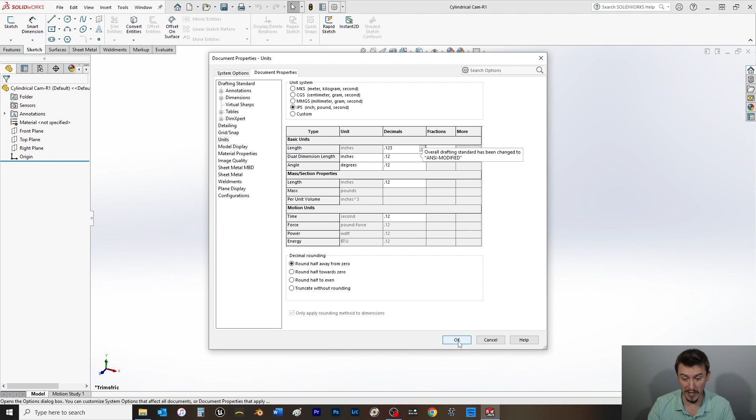And another thing we're going to want to do is come up here to the options, which is the little gear. We're going to go to the document property tab, go to units, and make sure that our length is set to 3 decimal places, and of course that we are in inch-pound-second if you aren't already. Click OK. Wait a moment for this to disappear.

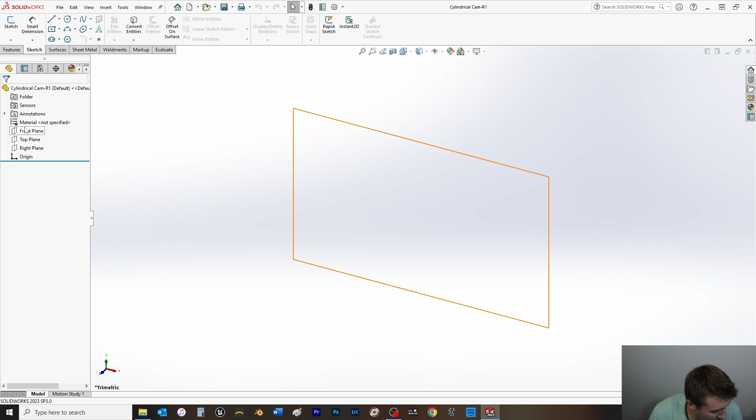And now from here, we're going to start with section 14.1 on page 305. We're simply going to draw a cylinder. So we will choose the front plane for this one. Control 8 to bring it normal to. Come up here and choose a circle. We'll make the center point of the circle coincident to the origin as always. No offsets here. Click and drag out, select OK, and then we are going to give it a diameter of 1.5 inches.

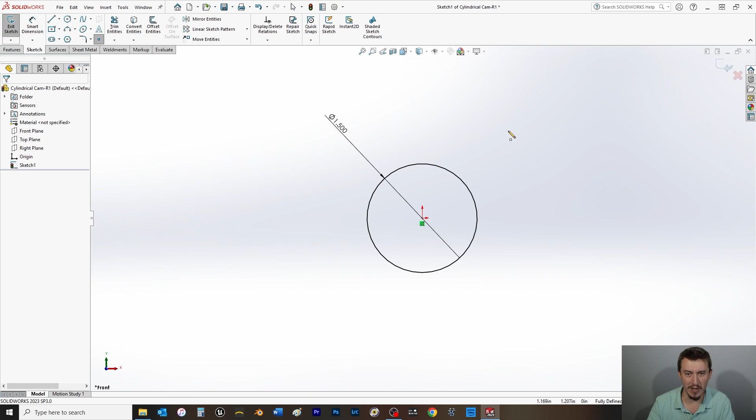And then from here, one other thing we're going to do, it's a simple little item to utilize, which is going to be a point. Depending on certain geometries, you may need a point to be able to create a reference in other situations. And you're going to see in a moment what this is going to come in handy for. So the point will be up here at the top quadrant. Click, select OK. Now something to keep in mind is I'm still in the point command, so we can click on it again to close out, or you could hit escape a couple of times.

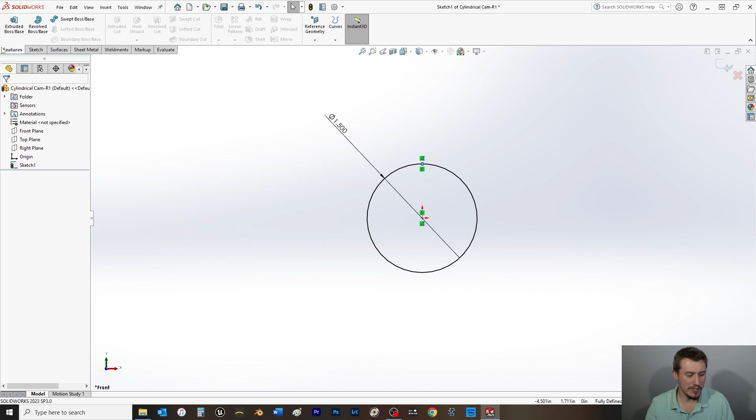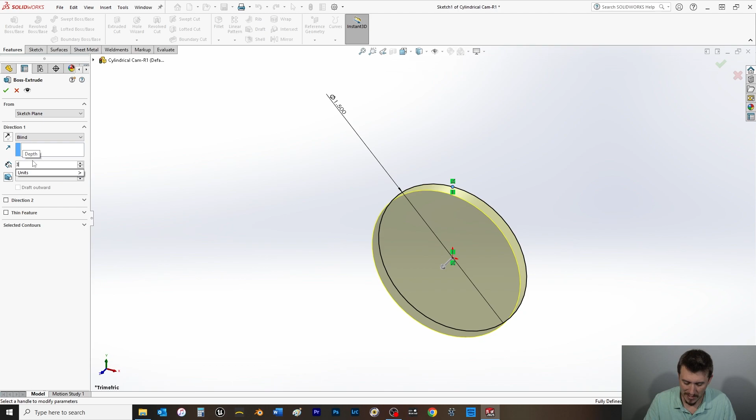Now from here we're going to go to the Features tab, and then we're going to choose the Extruded Boss Base. And in this case, we will do a boss extrude of 3 inches with the end condition being blind. So we'll leave it blind and we'll do 3 inches, enter, switch the direction the other way, click OK. Hit Control S, spacebar to bring it isometric, and we'll now move on to section 14.2 at the top of page 306.

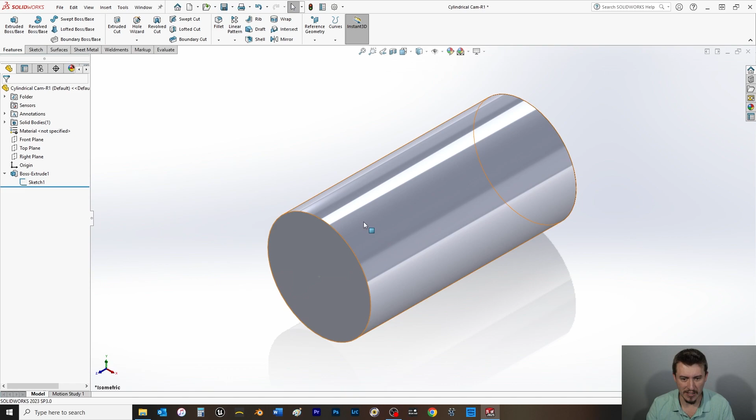Alright, so the next thing we're going to do here is move on to section 14.2 at the top of page 306, where we're going to create an auxiliary plane. And now we're going to implement that point from the previous sketch. So the first thing we can do here is in our feature tree on the left, choose the drop down arrow from the boss extrude feature, select sketch 1, make sure that it is visible. And then I'm going to rotate the part just a little bit and zoom in so you can see there's that point we made. It's a little difficult to see, but in a moment it'll be a little bit better.

So from here we can then, in the feature tree, select the top plane, because we want this auxiliary plane to be parallel to that and coincident to this point. So we'll have the top plane selected first. Again, there's 2 ways you could do this. You could start into the auxiliary reference geometry plane first, then select all of your coordinates or points and planes, but we'll work in this method.

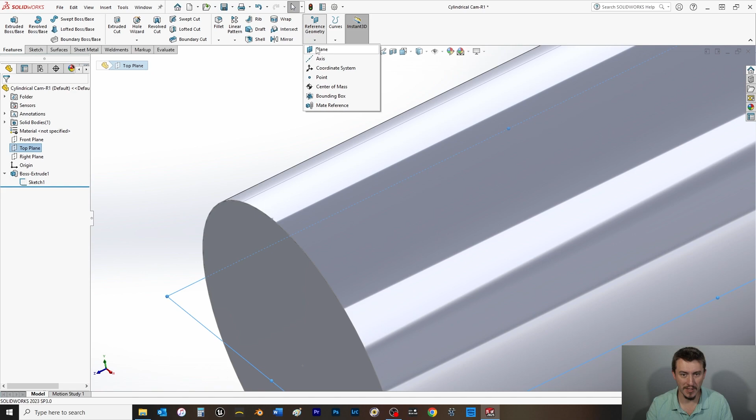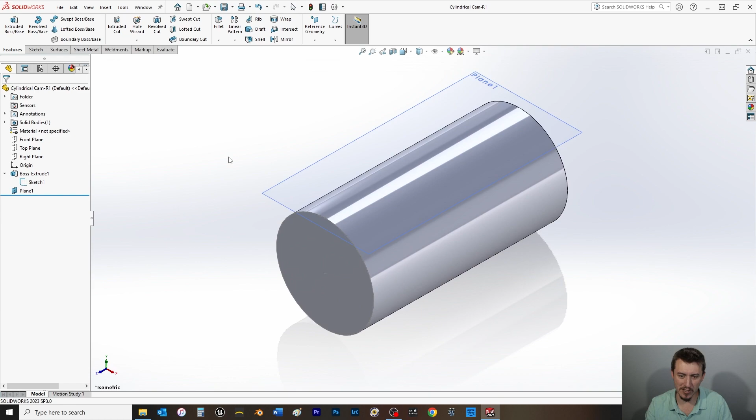So select the top plane, choose the drop down in the Features tab, plane, so now it's going to be the top plane, and it's just set with an offset distance right now, but then we're going to select that point there. And now this plane is fully defined. So from here we can select OK, and then we'll hit Control S, hit the spacebar, keep it isometric for the moment, and we'll now move on to section 14.3 at the middle of page 306.

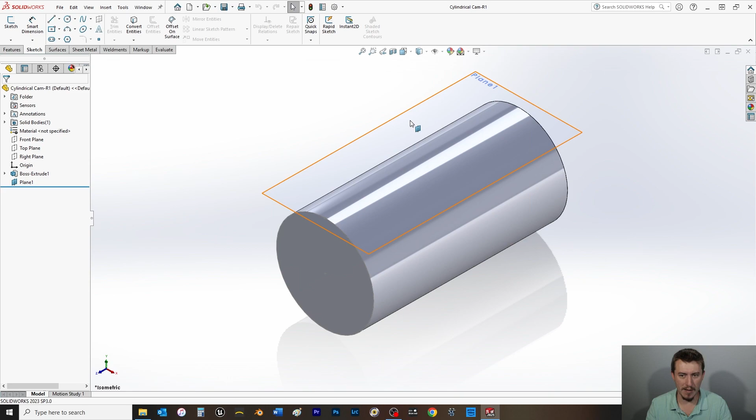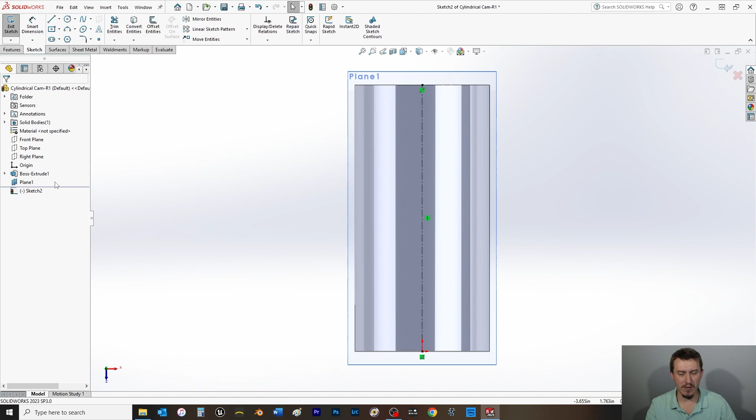Alright, section 14.3 at the middle of page 306, we're going to create the sketch profile for the wrap feature. So, let's grab this auxiliary plane 1 from either the feature tree or the graphics view, Control 8 to bring it normal to, come up to the sketch tab, and we'll start out by creating a center line, which will be midpoint the silhouette edge of the cylinder at the top and the bottom. Right click, select, and then from here we're going to use the mirror feature in a new way. Come up here to Tools, choose Sketch Tools, and choose Dynamic Mirror, and then we'll select the center line. Now notice down here at the bottom there's a little equal sign to indicate the dynamic mirror is active.

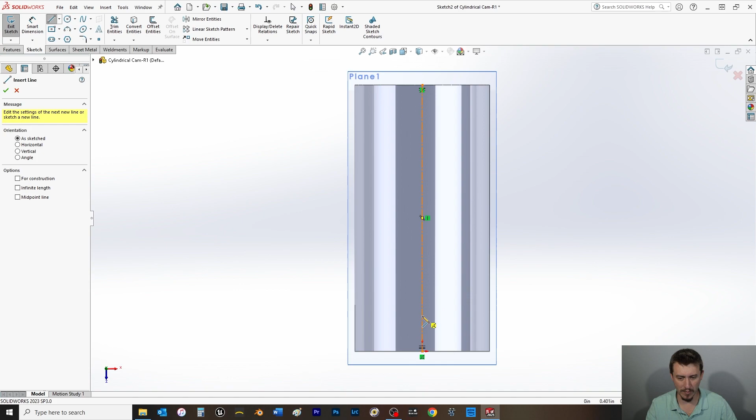Then from here we'll start our sketch. I'll choose a line and we'll make sure that one endpoint is coincident to the center line. Do a horizontal relation, drag out. And from here, as in previous videos, you can drag down to create an arc as such. Then we'll drag up to do a vertical line, and then we'll drag back in and create another arc like such, and then drag out to create another horizontal line, click and right click and select. Now notice as I sketched on one side, it copied it over to the other side automatically.

So that's the instant difference of dynamic mirroring versus the standard mirroring procedure, which is you draw your sketch, select all the sketch entities, then choose the center line to mirror it about, and then it mirrors it. So they'll have their advantages. Certain times you won't want to mirror every single sketch entity, so then you would want to use the regular mirror command in that case. But in this case, the dynamic mirror works out very well. So from here we can go over to page 307, where we're going to add the dimensions.

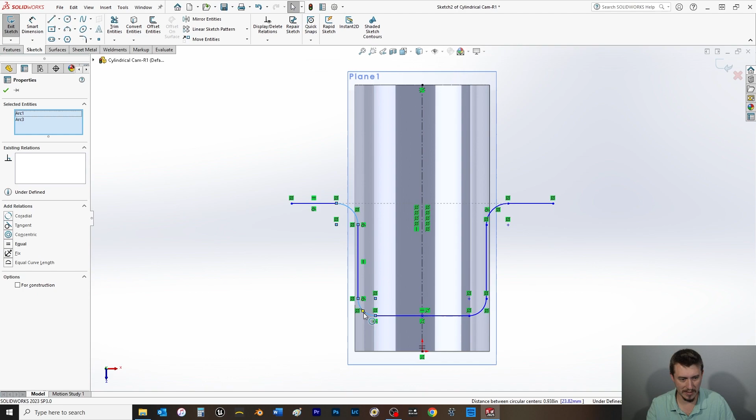So another thing we can also do real quickly too is press and hold the control key, select this arc, and do equal. And then from here we can choose the smart dimension, and then we're going to make this a 0.5 radius. And then we're going to make this point here and here 2 inches.

Now one thing I'm going to do real quick is drag this back up here, and then we'll also grab these lines, bring it back out, and drag it up just a little bit, just make some minor adjustments. And then we can choose our smart dimension, and this bottom line here to this point here is going to be 1.75.

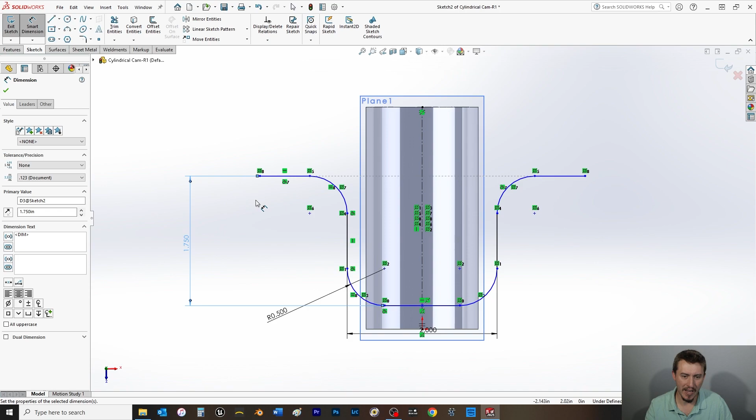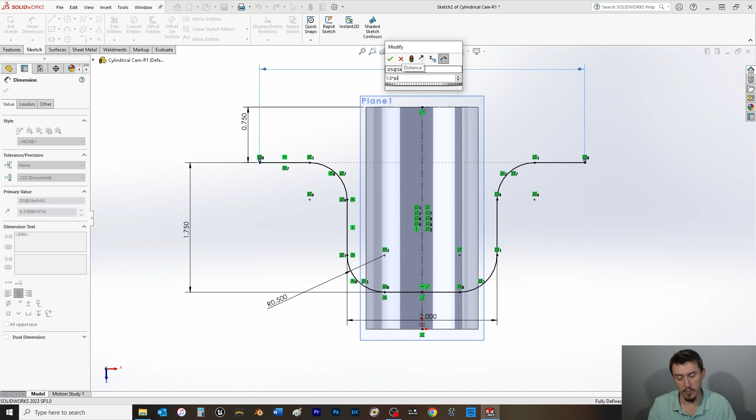And then from this point here to the silhouette edge of the cylinder will be 0.75. Now we're almost fully defined, so we're going to grab this point here and this point here. This one's going to be a little bit unique. As I've mentioned before with dimensioning, you can do equations. In this case, we're going to do 1.5 times lowercase pi, 3.14, so on and so forth. Hit enter, and that's going to allow us to wrap completely around the circumference of the circle.

So from here, we can go to the top of page 308, section 14.4. Alright, moving on to the top of page 308, section 14.4, we're going to complete this profile and close it out simply with 2 lines and the offset command.

What's nice about the offset entities, which is up here under the sketch tab, we're going to select that, and we're going to set the offset to 0.25. We're going to make sure to add dimensions, select chain is selected, and bidirectional, which will give us an overall width of 1/2 inch. The other thing we're going to do down here is under construction geometry, choose base geometry, which means all of this here will become a center line for reference, and then the 2 offsets will then be regular lines, which will become part of our wrap feature profile.

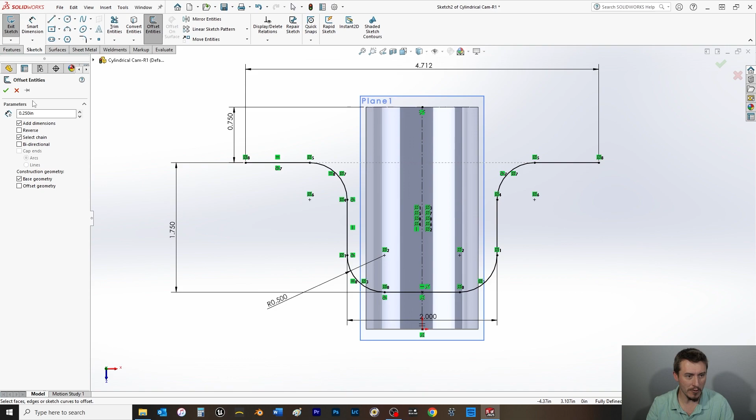So with everything selected, we can simply select one end, and you can see how it's made a chain here. And we'll make sure that bidirectional is selected, so that gives us our thickness here. Then we can click OK.

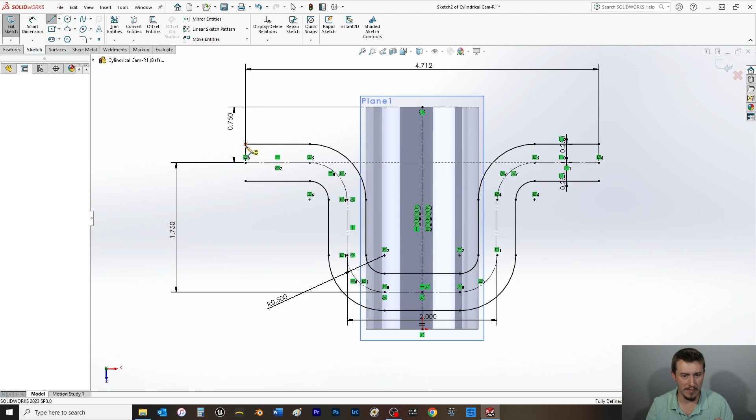And the final thing that we need to do is just add a line from this point and this point here. Again, with the mirror command still active, it's going to add it to the other side, so we can select OK. And that brings us to page 309, section 14.5.

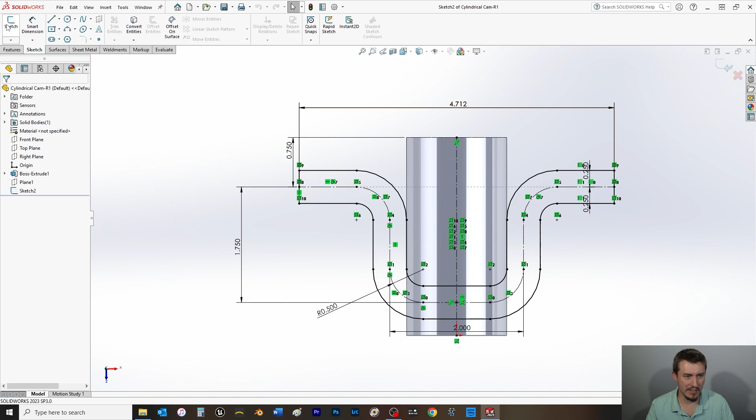Alright, before we move into section 14.5 at the bottom of page 309, we will exit out of the sketch, and then we will come here to the feature tree and make sure that sketch 2 is selected. And now we can go to the features tab and start the wrap feature.

And from here we can go to page 309 to 310, where we're going to change some properties over here. There's 3 different wrap types: there's emboss, deboss, and then there's going to be scribe. And we want to choose deboss in this case.

I do recommend you read up in the book about the differences. Emboss is going to extrude, deboss is going to cut into, and then scribe is a slightly different feature.

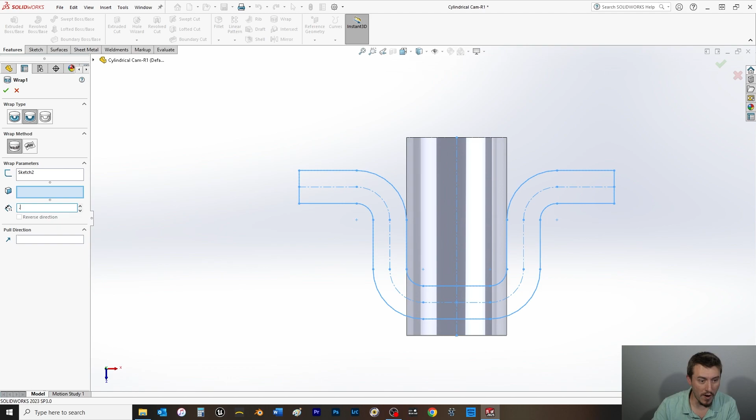Then our wrap method is going to be analytic, or the other option is spline surface, but we're going to keep it on analytic. And our depth is going to be 0.1. And our surface we're going to select, I'm going to press and hold to rotate the cylinder. Select the cylinder, and then we can click OK.

And then I'll hit the space bar and bring it isometric, Control S. And then we'll now move on to section 14.6 at the top of page 311.

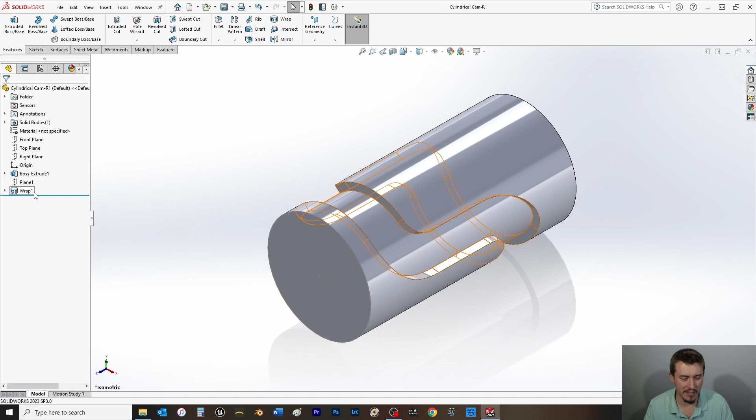Alright, we're in the home stretch with section 14.6 at the top of page 311. The final feature we're going to add here is a fillet. So to make it simple in this particular case, we can actually select the wrap feature from the feature tree and simply select fillet under the features tab. And then from here, we can do a radius of 0.02. Select OK.

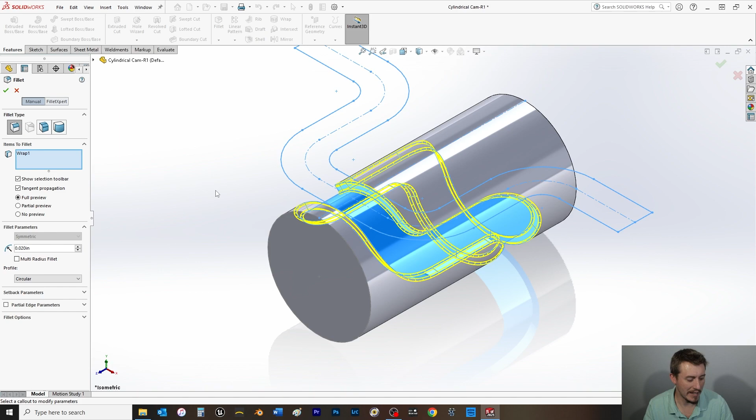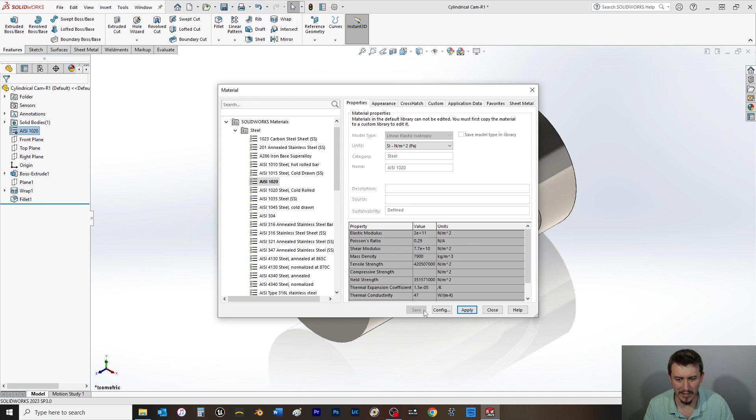And then, once it's done thinking here, we will add a material to it. Come up here to the materials, right click, and then we're going to go into edit material, and choose AISI 1020 steel, which is this one right here. We'll hit apply and close out, and then we will hit Control S to save it.

So that is one method for a wrap feature. In the next video, we're going to go over another method for uneven surfaces where we're actually going to apply it to the bottle that we've already made.

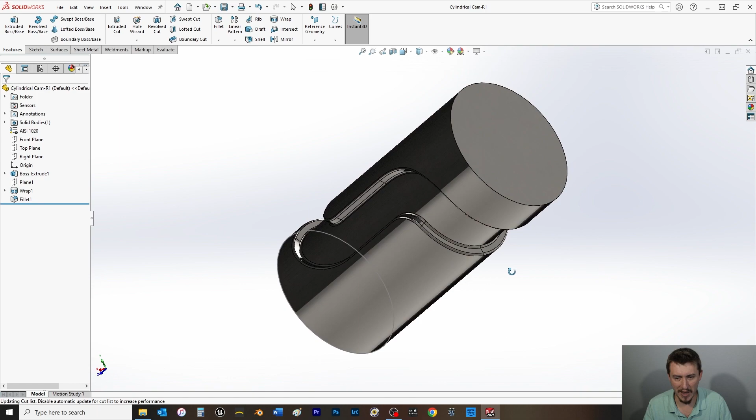So we'll do a quick spin here just to kind of show that this cam groove we created in the cylinder, it wraps all the way around it like such. And then I'll do spacebar to bring it back isometric. And that is it.